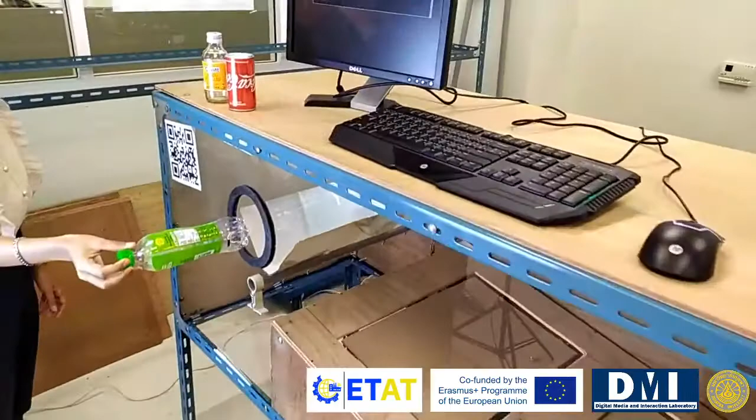You can see the process here. The first one is the can, the second one is a plastic bottle, and the last one is the glass bottle.

We are in the optimization stage, to let everything work smoothly. This is the project we want to expand, to have a real station like Reinhard already mentioned, with several cameras or sensors that we can use with the PLC from PLCnext technology to adapt and attach to this kind of system.

Right now we try to optimize this by using another board instead of the Raspberry Pi, because the Raspberry Pi is a little bit slow for AI computation. So we try to use a board from NVIDIA - the Jetson Nano. It should be better than the Raspberry Pi.

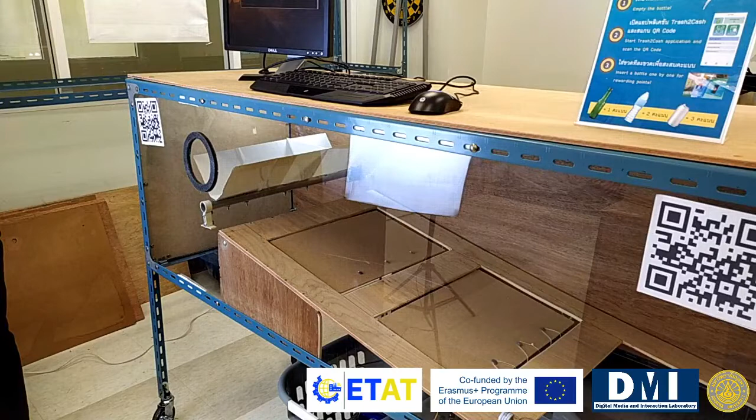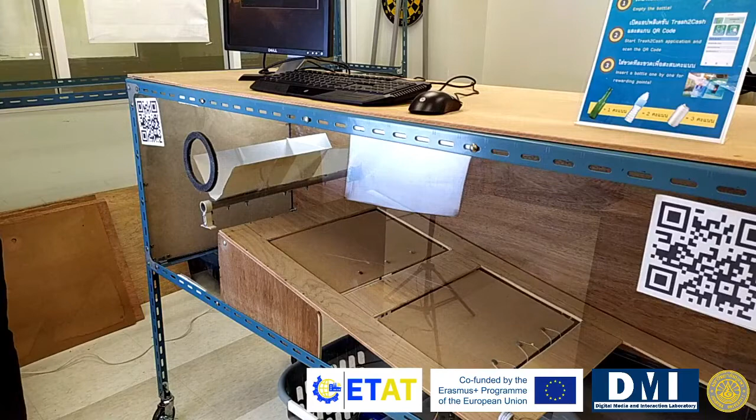The problem in Thailand is that many people don't care to separate the waste, so there's a lot of plastic waste in the sea. The Bang Saen city wants to motivate people to do separation, so we use a point collecting system to motivate them to use this technology and get some benefit from separating the waste. So yeah, that is our first project.

And right now, the accuracy of our recognition system is about how much?

This is about 89%. And then, well, we try to use the board, the other board, and the other algorithm system to improve or optimize it.

The time it takes to recognize one bottle is like 2 or 3 seconds, because we have to get the frame from the picture and analyze it a bit. We use the Raspberry Pi to recognize locally.

Some said, why don't you let the server recognize the image instead? But we found that if we send the big image over the internet, it takes longer to send the data, and the whole process would take more than 6 or 10 seconds to recognize just one bottle. So local recognition is better.

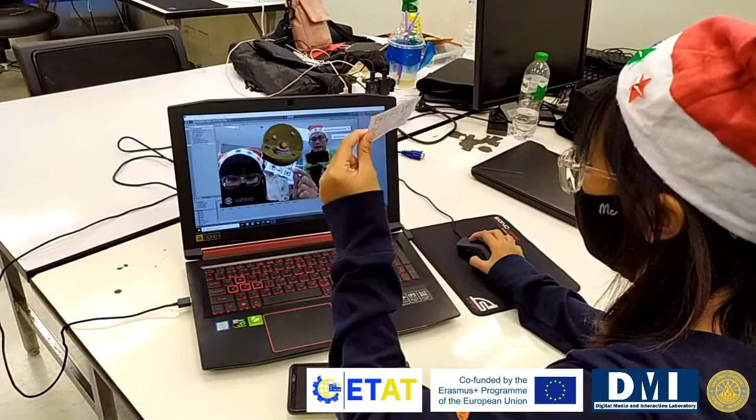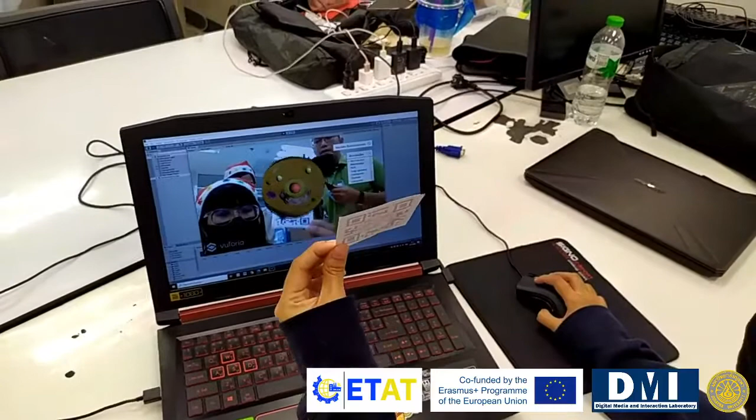As you can see from the picture, we use a marker. We will use such a marker, and with this marker we let the computer show the 3D model — in this case the animal cell with the nucleus and everything inside. This is the developed version on the computer.

With the smartphone, it will look like this. The student can interact with this 3D model through different functions — you can use the menu to go to different parts. The smartphone is a little slow, but you can go inside the 3D model and interact with it.

The idea is to use this in maintenance in industry, where they just point the camera at the plant and get information from it — which part is which, what it does, or get instructions on what they should do.

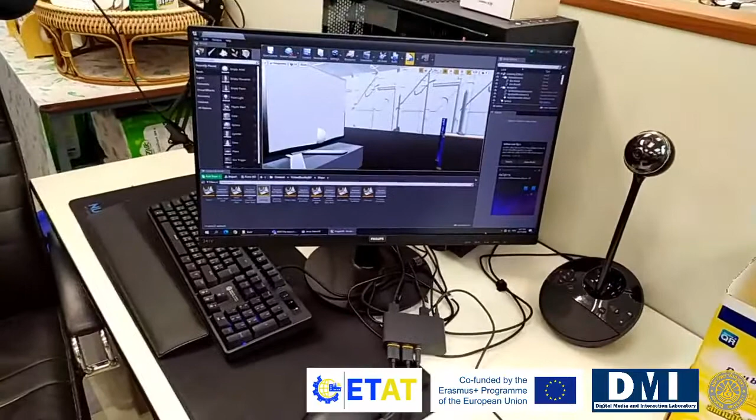Okay, let me explain the VR first. This is the VR system that we try to implement for the training session for EV production.

I have to say that we just try to get information about EV electric vehicles from the internet, YouTube, books and everything, because we don't have real experience with EV production yet. So we tried to talk to different companies, but the feedback was mixed. Some said it's very interesting, but right now they don't need it. I told them not right now, but in the future you will need it a lot.

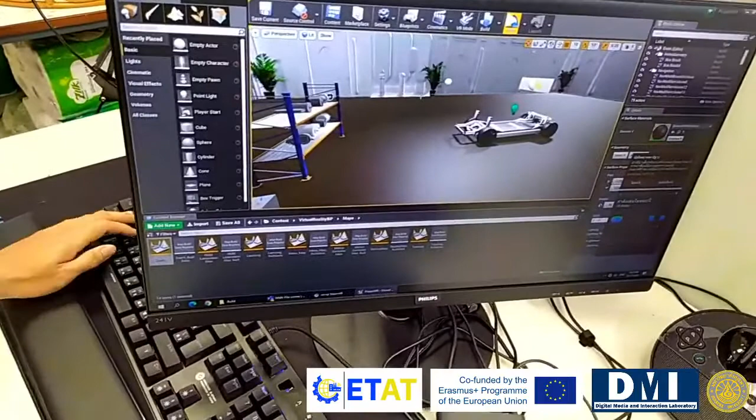But yeah, let's see. This is the environment that we just created. We created a chassis from an EV vehicle, and on the shelf there are some EV parts, like motors or gearbox and what else... motors and gearbox.

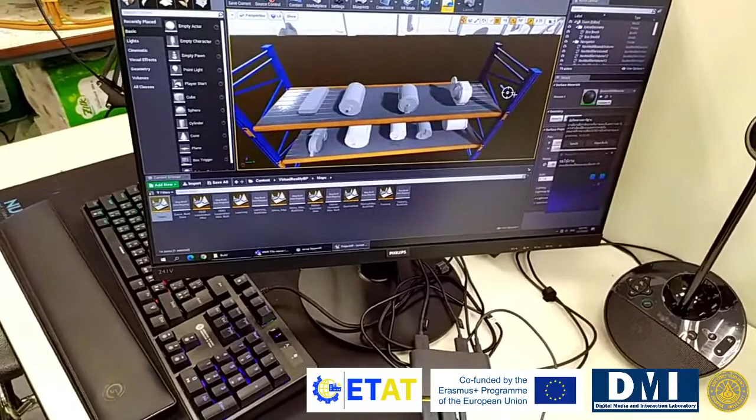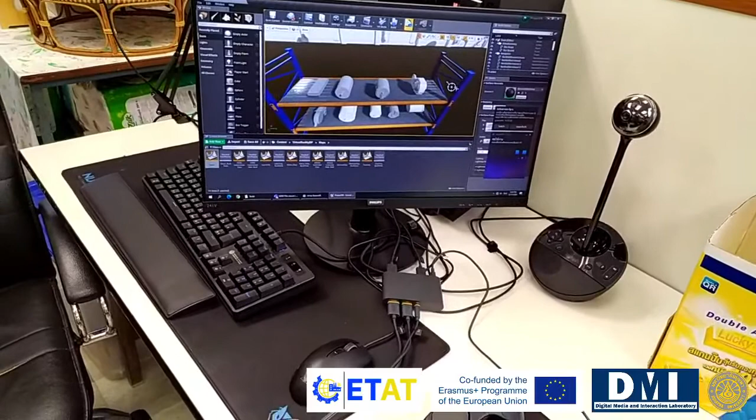We try to let them get the basic idea about the EV by letting them put every part together. If it fits together, it will snap together, and then we will put it in the chassis of the vehicle. So this is the basic idea, and this is the learning system right now.

It has 3 parts. The first part is about the knowledge, the learning. If the user gets into this part, they will get information about the parts of the EV. You get the video, get the basic knowledge of how the motor or electric motor works, and something like that.

The second part is about the training. The learner will be guided through the learning courses. There will be instructions like you have to put this part together with this part, and so on.

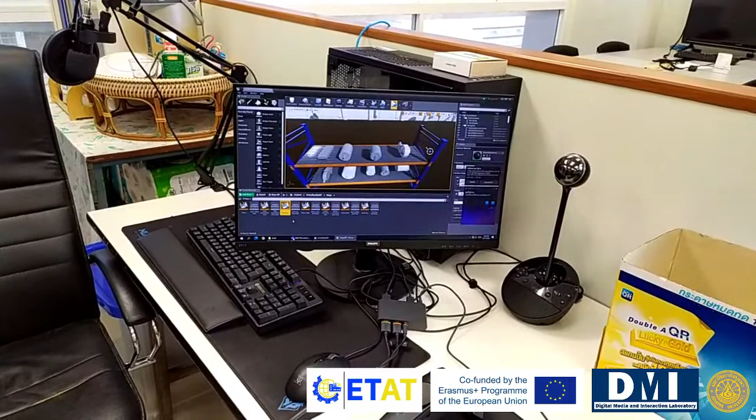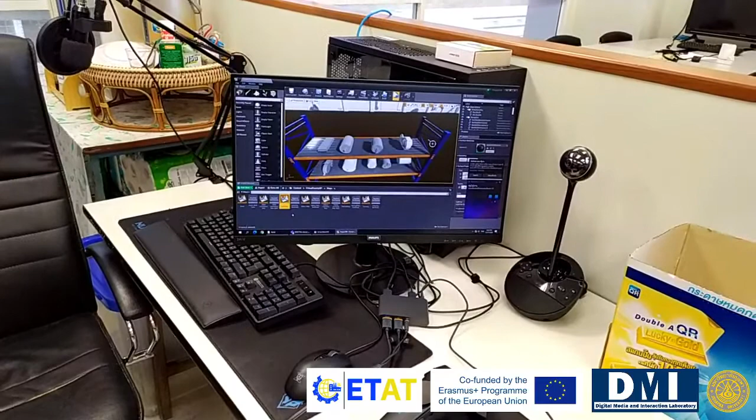The last part is about the exam. In the exam, they will be allowed to do it freely, and then we will collect the activity of the learner and analyze their activity and so on.

So let's move on and let my student show you how the training works.

First of all, he has to put on the glasses. This is the VR glasses. We use the version from HTC Vive. This is the CE version, which is more or less the first version, and maybe not the best one, but still the cheapest one. So this is the cost.

So if he goes inside the virtual reality... yeah, I can. This is the first part, about the learning. If the learner picks up a part, the video will start, and they will learn from the video. You can see that.

For the next part, he can decide to go to the training part. Can you see the menu? Yes, okay, the training part.